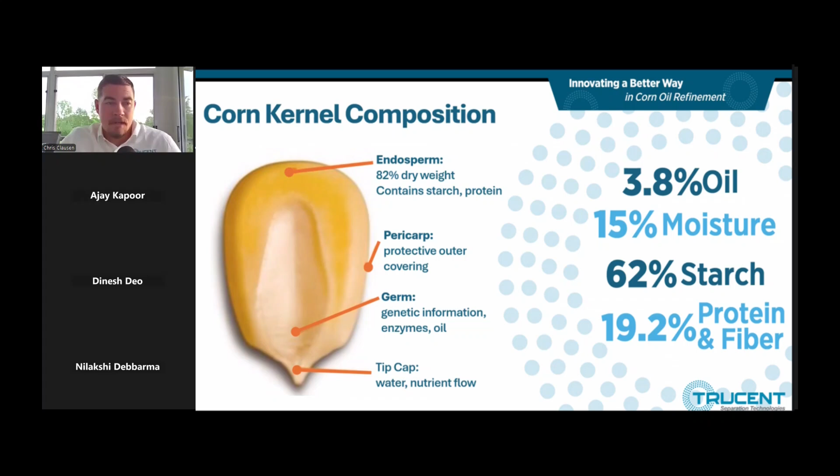I want to start with distinguishing a little bit between distiller's corn oil, which is what we're talking about and the term generally used for oil coming out of a corn ethanol plant, versus food grade corn oil. These are two different things. I'm not aware of any country that has approved distiller's corn oil for human consumption, but it is a very high value product for several other industries.

It is a very high quality fat source for the animal feed industry, and where we're seeing a tremendous amount of growth for demand for corn oil is in the renewable fuels sectors. Because of its low carbon intensity score, it makes it a very sought after feedstock for renewable diesel, biodiesel, and sustainable aviation fuels.

It is the fuel mandates, the green fuel mandates across the globe, that are driving up demand for corn oil. So there's also a large export demand that is available to any DCO producer.

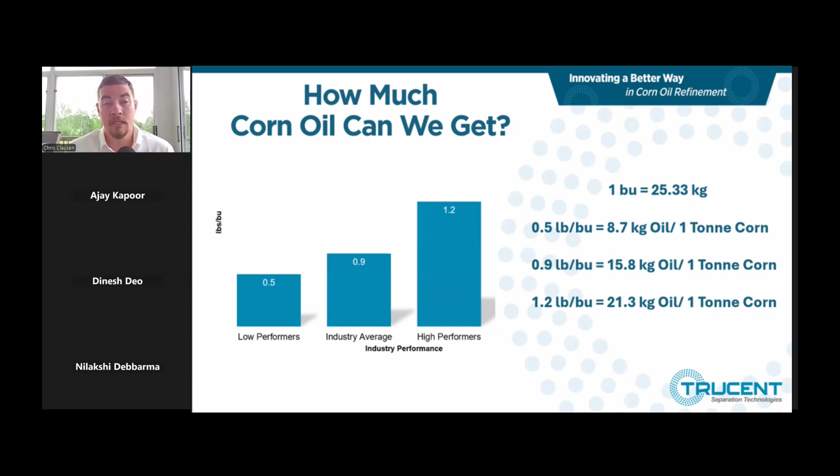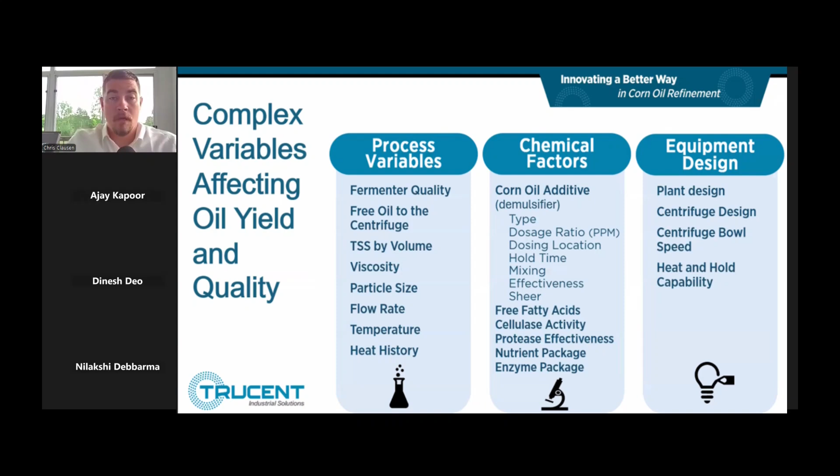The physics around how we extract corn oil, or any fluid separation, is governed by the physical law of Stokes' law, which is a modified version used for oil extraction. What this is saying is that the velocity at which separation happens is dependent on the droplet size squared, times the difference in densities between the fluids, times the centrifugal acceleration, over a constant times viscosity. And that is how we extract corn oil.

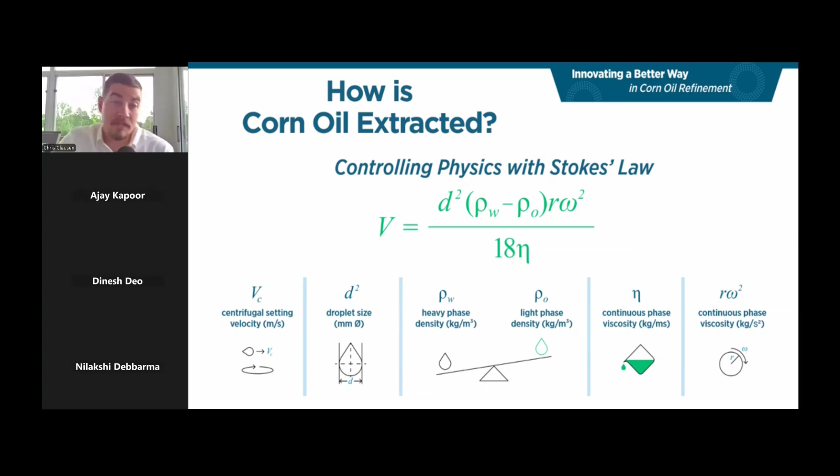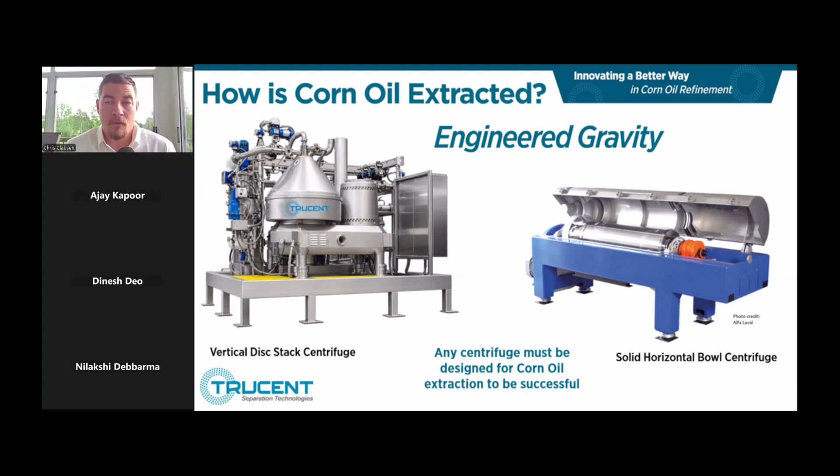That centrifugal acceleration represents us engineering gravity, and we do that with centrifuges. There are two basic types of centrifuges used in this application: the vertical disc stack centrifuge and the solid horizontal bowl centrifuge. Any centrifuge used in this application needs to be designed for corn oil extraction. There are hundreds or thousands of different centrifuge designs, both vertical and horizontal, but there are so many design variables that to be successful, you really need to start with a design meant for oil extraction. Just because it spins doesn't mean it's going to separate the corn oil. The corn oil separation is actually quite a difficult and technical one, so starting with a successful design is very important.

Looking into these two different types of centrifuges, we'll start with the horizontal type. The horizontal bowl is rotating, and within that bowl there's a scroll with corkscrew flights attached to it. The bowl and the scroll both rotate, but at a different speed, so there's a delta in speed between the two, and that's important in its operation. We're going to walk through that now.

The feed, or the syrup, the thick slope, is injected through the center of the scroll and put into the bowl. It gets up to rotational speed. The delta between the bowl and the scroll allows the flights to move the solids to one end of the bowl. The end of the bowl has a taper to it, allowing the solids to compact. Generally, the term used is to create a beach of solids, which forces it out one end of the bowl, allowing the liquid phases to move to the other end.

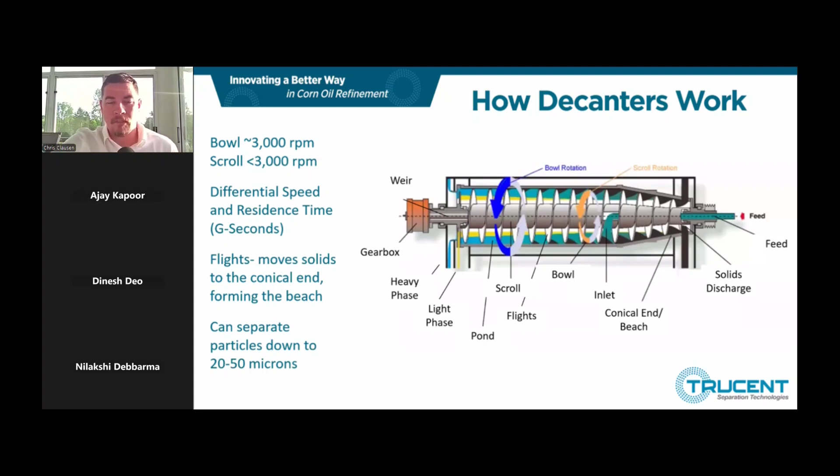The vertical disc stack centrifuge is a smaller, more compact system. There's a rotating bowl within a housing similar to the horizontal, and also similar to the horizontal, the feed goes down the center of the bowl. In this instance, instead of having a constant solids discharge, the solids are built up in the bowl and then periodically discharged, generally called a shoot because there's a loud noise that comes with that as those solids are expelled.

The liquid phases then travel into the disc stack, where it gets its name. The disc stack is just a set of plates essentially, and that increases the relative surface area within the bowl so that the phase change can happen in a smaller area, which just increases efficiencies.

So these bowls, because they don't have the mass of the larger horizontals, and because of the way they're manufactured, are able to spin at higher RPMs and generate more G-force. That higher G-force and increased relative surface area allow these systems, generally speaking, to be more efficient and to separate down to a finer micron. Across the industry, the higher performing systems can separate down to about one micron.

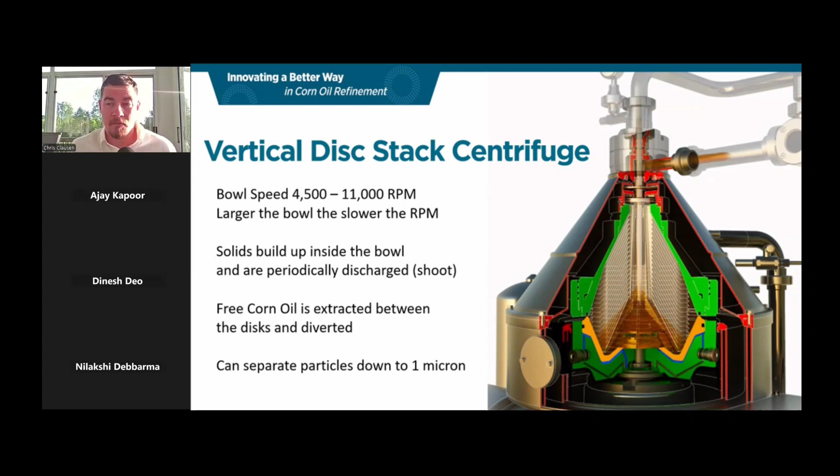The oil phase is routed to a centripetal pump, which creates pressure so it can be pumped downstream. Similarly, the heavy phase, or de-oiled syrup, is sent to a centripetal pump—centripetal, not centrifugal, because the fluid is already spinning; we don't need to spin a centrifugal vane. We use the motion of the fluid to create that pressure, discharging these liquid phases under pressure, which allows the skids to be more compact and removes the need for a raised platform.

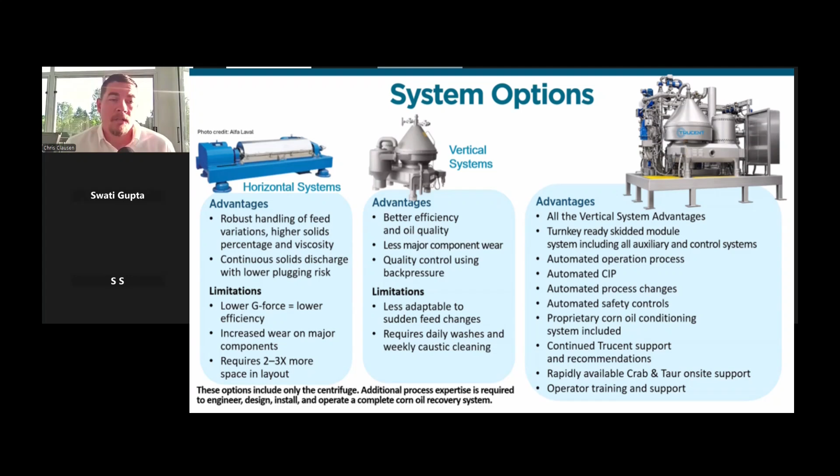There are advantages and disadvantages to either of these technologies, with proper design, engineering, and the auxiliaries needed for each. Both are very successful in extracting corn oil. For any corn oil extraction system, it's very important to maintain a regular sampling and testing regimen in your lab—we'll get into that a bit later. Being able to make real-time changes to either system will keep them running at high efficiencies.

The horizontal systems, because of how they're manufactured and their general design, don't have as tight tolerances or gaps, making them more robust to handling feed variations, higher solids percentages, and changes in viscosity or solids loading. Because of that, they have a lower risk of plugging—plugging being when solids get so compacted that they no longer flow through the centrifuge. But they're limited on G-force and efficiency, and they're also physically larger systems.

The vertical disc stacks have better efficiency and can generally produce higher quality oil. Because of the higher tolerances, they generally have less major component wear, but they do prefer a more steady feed to the centrifuge, so making slower changes to the feed makeup is beneficial for this type.

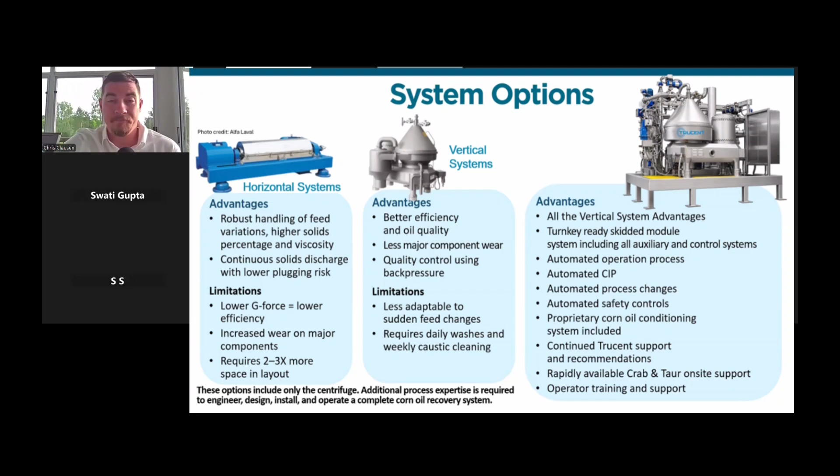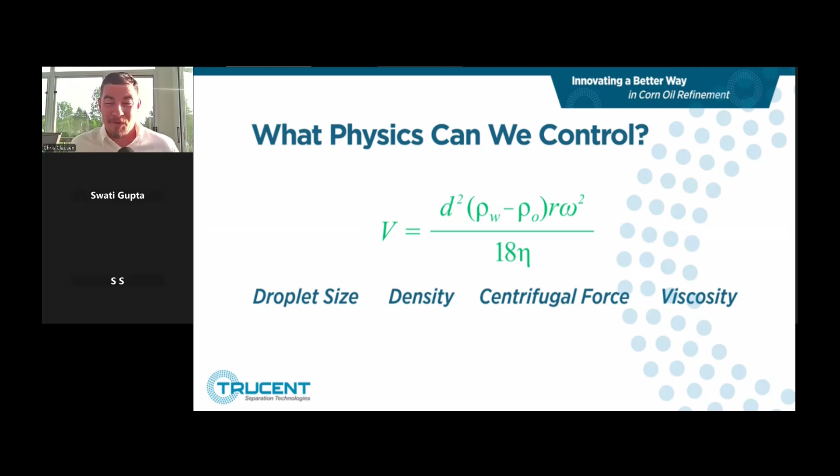Now that we've covered the how, I want to touch on a few of the variables that are important to know about, which you can control to get as much oil as possible and really optimize any extraction system. So as most things go, we go back to the root, which is the physics.

When you're looking at Stokes' law, there are a few variables we can control and some we can't. The densities are fixed and defined. The centrifugal force is a design variable of the centrifuge, so once you've landed on a system to install and implement, that's a fixed variable. But we can influence droplet size and viscosity—I shouldn't say control, we can influence them. And I'll throw in another variable, which is the time exposed to gravity.

There's a unit we use called G-seconds, and you can influence that by the flow rate to the system. Obviously, a lower flow rate into the centrifuge means more time within the bowl, so the syrup is exposed to more G-seconds—how much gravity over how much time.

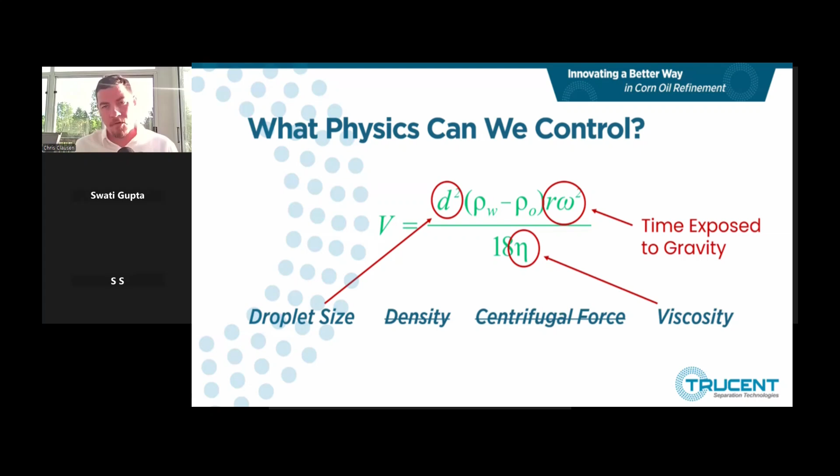We're going to start with droplet size. If you look at the math, you'll see that the droplet size, D, is squared, which means if we double the diameter of an oil droplet, we'll quadruple the velocity at which it separates, or quadruple the efficiency at which it comes out. We do this in a few ways to increase droplet size—there's a family of chemicals available that create larger droplets, commonly known as demulsifiers.

Although they do have a deemulsifying component, the way I like to think about them is as conglomerators and coalescers. Picture an octopus with long tentacles - the chemical becomes a barrier between the negative charge that's holding the droplets together. I envision the octopus reaching its tentacles out, grabbing the small droplets, and bringing them together to nucleate and create a bigger droplet.

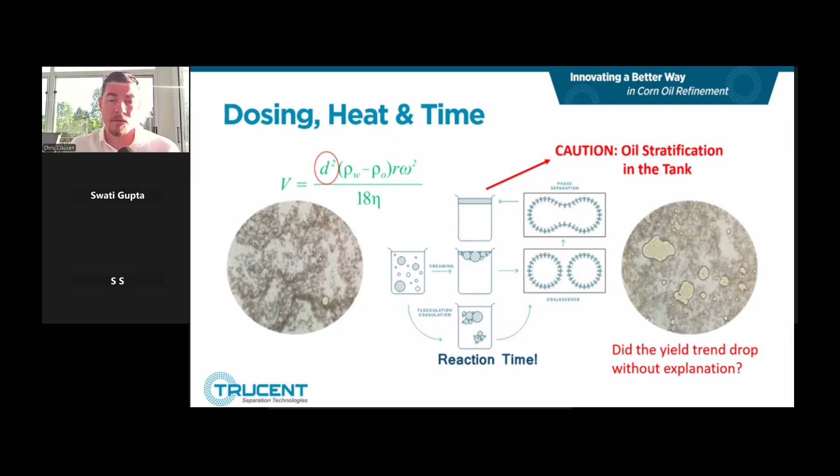In order to know the proper dosage ratio and heat and hold time, everything goes back to doing benchtop sampling. Knowing what is going on going to the centrifuge, and what is going on in the centrifuge, is very important to maintain the highest efficiencies - so taking samples and doing a microscope analysis.

On this slide, if you look on the left, you can see the small oil droplets in the feed. On the right, after it has been dosed with chemical, you see these much larger oil droplets that are a lot easier to extract.

You'll also see that in a benchtop centrifuge test. So you take a small sample, spin it on a benchtop, and you'll see the break. You'll generally see 3 or 4 phases: a solids phase, a de-oiled syrup phase. There may be an emulsion phase, and then your oil phase.

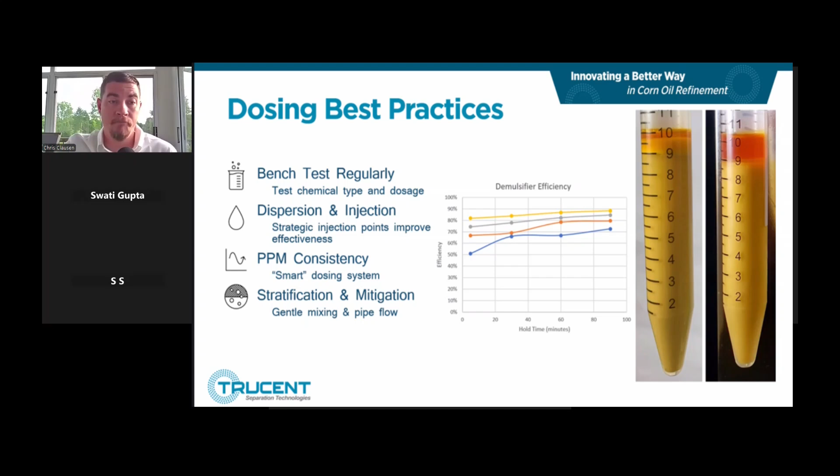The other variable I want to touch on is viscosity. Viscosity has a tremendous impact on the effectiveness of an extraction. If you think of trying to remove a marble from peanut butter, if you heat that peanut butter up and make it less viscous, it separates a lot easier. It's really the same concept here.

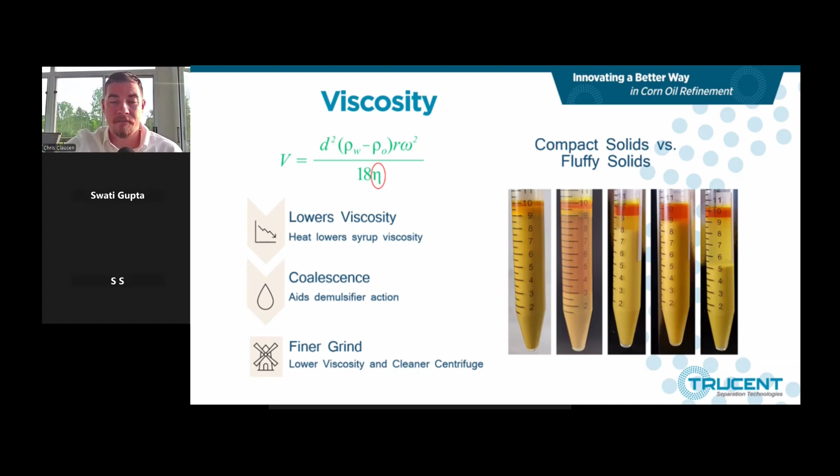I appreciate your time. I want to give enough time to be able to answer some questions, and I hope that everyone is excited about corn oil. We think that it's going to be a major part of the Indian ethanol market's future.